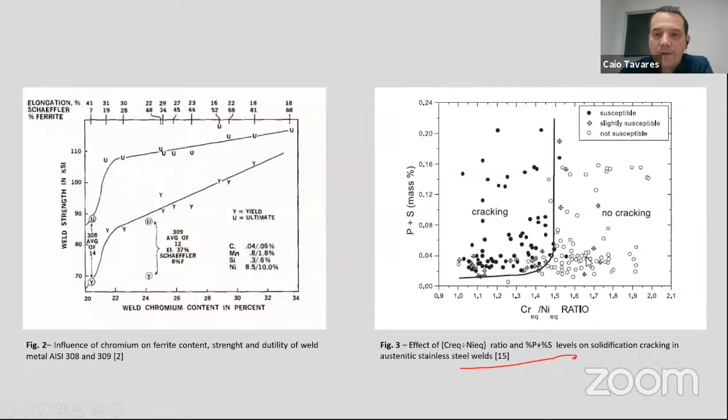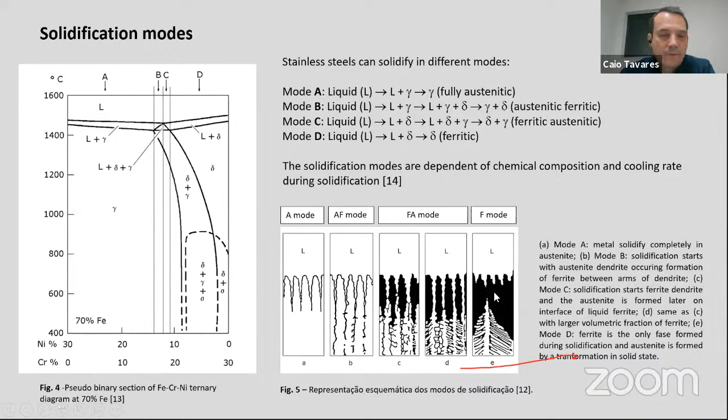So the phase diagrams are very important for austenitic stainless steel, to predict the kind of microstructure that you have. But unfortunately, most of the compositions that we have in the market have more than 5 components, and it's very difficult to find phase diagrams for stainless steel. Basically, what we find in the market are empirical methods, maps that indicate the amounts of the microstructure.

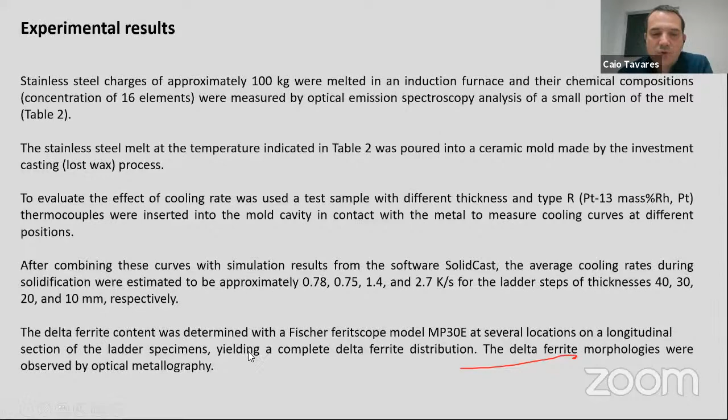To evaluate the effect of the cooling rate, we used a test sample with different thicknesses, and we placed a thermocouple inside to check the cooling rate. After casting, we combined the results from the casting simulation with SolidCast and the results from those samples, and we got cooling rates of 0.78, 0.75, 1.4, and 2.7 kelvins per second in different steps of the sample. The delta ferrite was determined using a Fischer ferritoscope in several locations of these specimens, and we also looked at the delta ferrite distribution in the microscope.

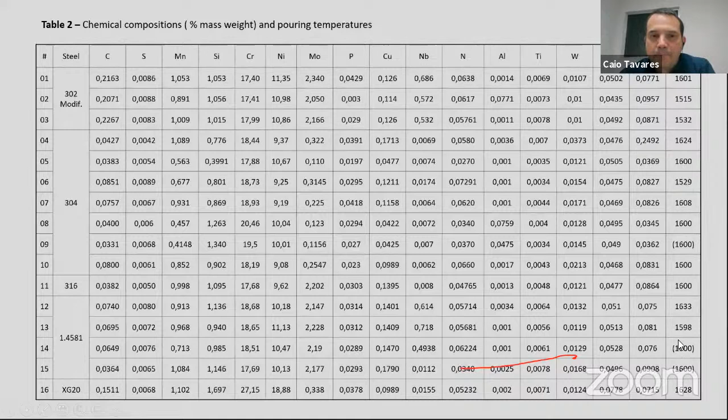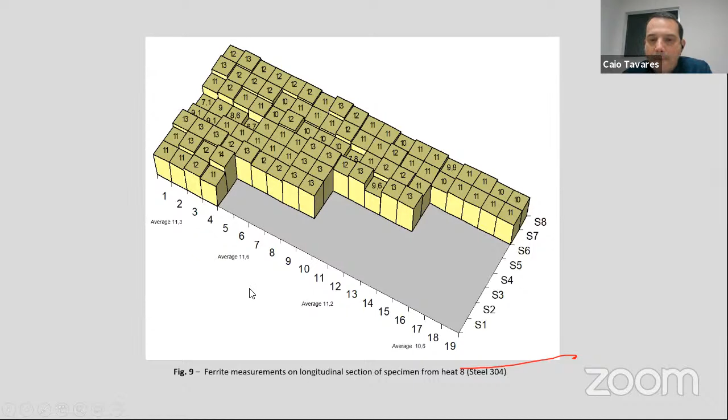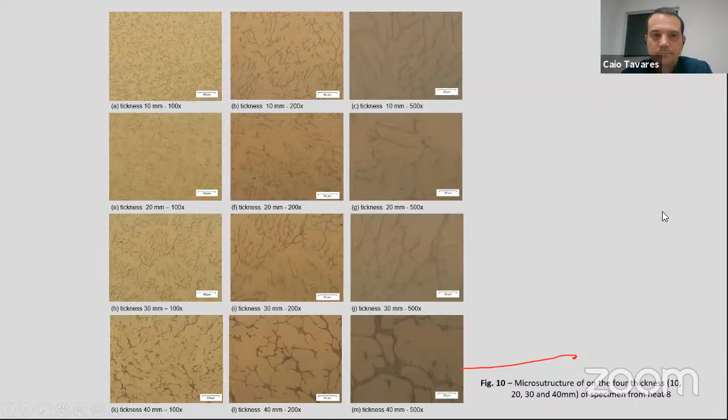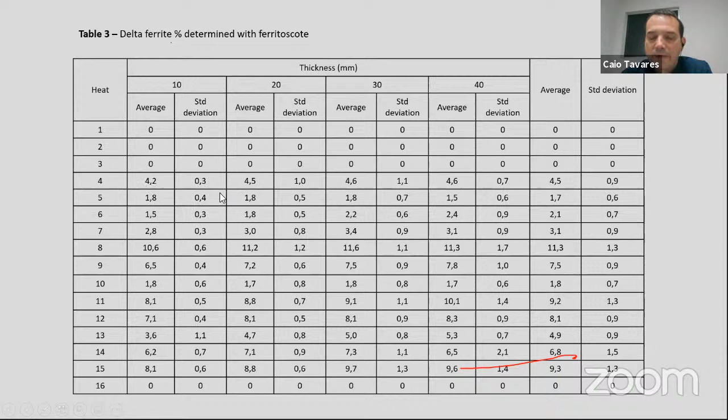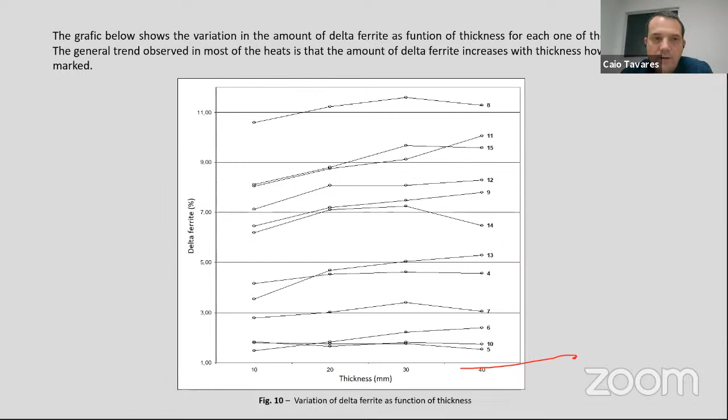In some samples we saw an increase of delta ferrite according to the thickness, but in some we didn't see too much variation. So the effect of thickness on delta ferrite is not very marked or pronounced.

So here's the analysis of the practical methods. After getting those results in these practical samples, those 16 samples, the intention is always to compare the results that we got on the far right with those formulas that I showed in the beginning, to compare the efficiency of each formula and see which one is closer to the results that we got.

So first of all, we need to calculate the chromium equivalent and nickel equivalent, using the proposed expressions, the ones I showed here in the beginning. Using those formulas, we tested all of them in this study against the results that we got in the samples.

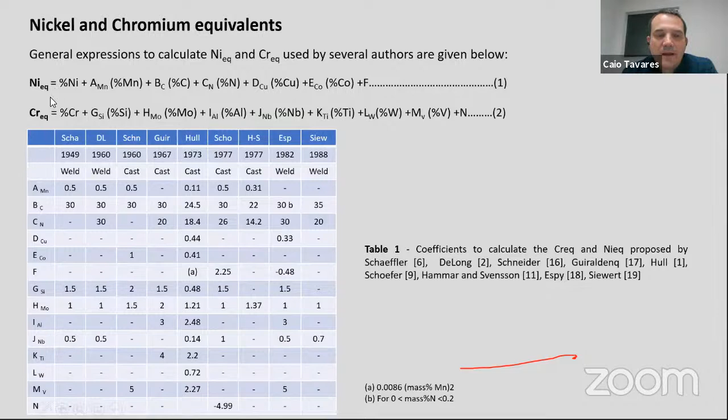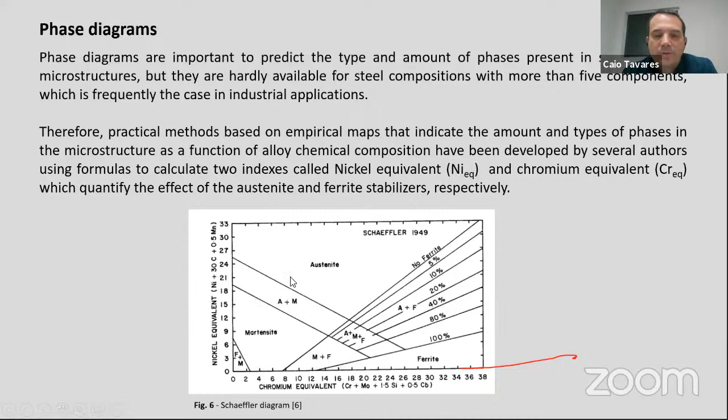When you get those values, we need to go to diagrams like that to evaluate the amount of ferrite in the microstructure. But unfortunately, some authors only propose formulas to calculate the chromium nickel equivalent, without giving us any isoferrite diagram. So when we use those formulas, we need to use the isoferrite diagram from another author.

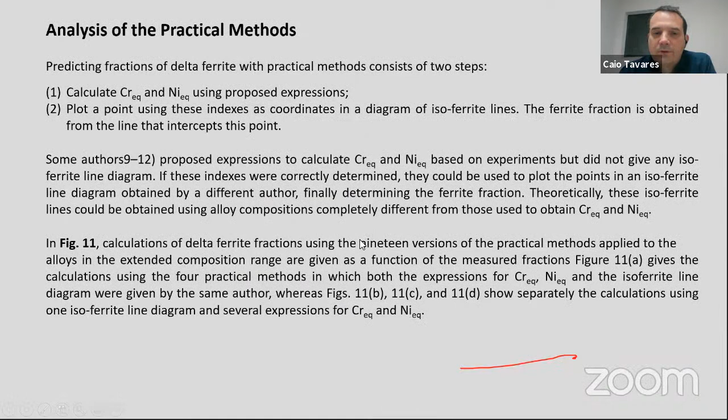Here on picture 11 we see the calculations of delta ferrite. Basically in this picture, we use the chromium nickel equivalent and isoferrite proposed by Schaeffler, one of these authors: DeLong, Siewert, and Schoefer.

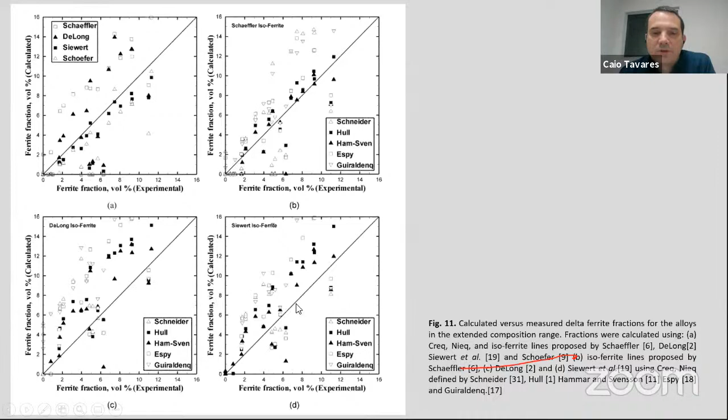In this one, we plot the results using the isoferrite line proposed by Schaeffler, DeLong, and Siewert, and using the chromium nickel equivalent proposed by Schneider, and Hammar and Svensson. So here in each map we use Schaeffler, DeLong, and Siewert, and we test those formulas to evaluate the one that is closer to what is predicted here.

So in order to interpret the results, we used some statistical parameters, calculating each group of alloy to better understand the difference between each formula. We calculate the relative error, the error, the standard deviation, and here the CI is the critical interval.

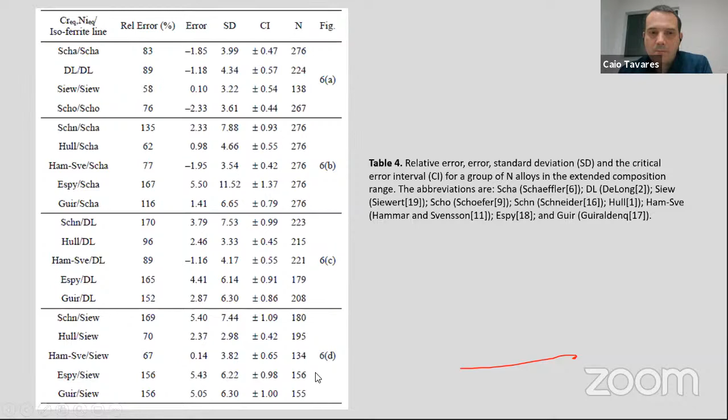And here were the errors that we got: the standard relative errors, error, standard deviation, critical interval of each of these studies that we did. And those are the graphics that we observed there.

So our conclusion here was, if we made different step thicknesses later in this work, to show the cooling rate and amount of ferrite on the microstructure. So we see that those samples have different cooling rates, but have a weak effect on the amount of ferrite.

And we see that in 50% of the specimens with ferrite in the microstructures, the hypothesis test indicates that increasing cooling rate decreases the amount of ferrite. It is in agreement with some results presented by Kim et al., and Pereira and Beech.

The calculation of ferrite fractions using the practical method proposed by Siewert gives us the lowest relative error among the 19 methods examined in this work. So this was the best formula that we got, that's closer to the results we got in ferrite content in our samples.

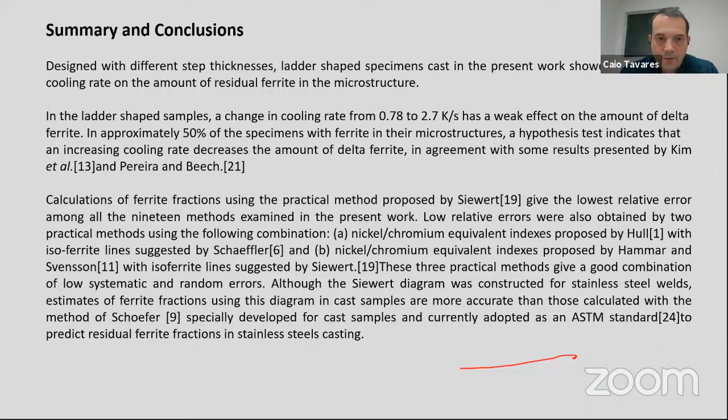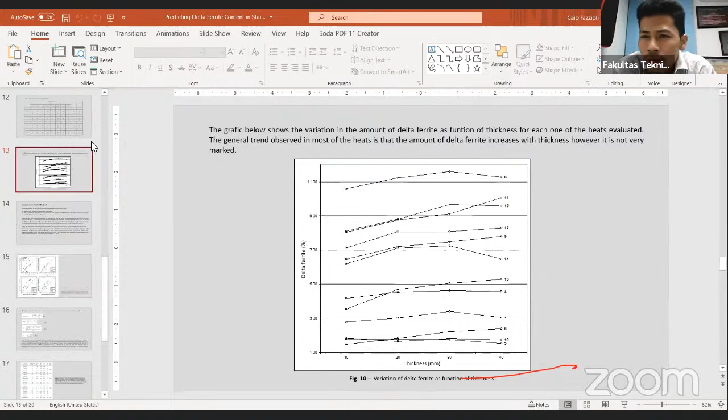Austenite is non-magnetic, as I remember. Yes, that's correct, and the delta ferrite is magnetic. So you use the eddy current method to distinguish the amount of the magnetic portion that you have inside the microstructure.

Okay, so we are still waiting for the next question. I will ask you again, Mr. Caio. Even though I don't teach the course in steel, I'm just curious about your slide.

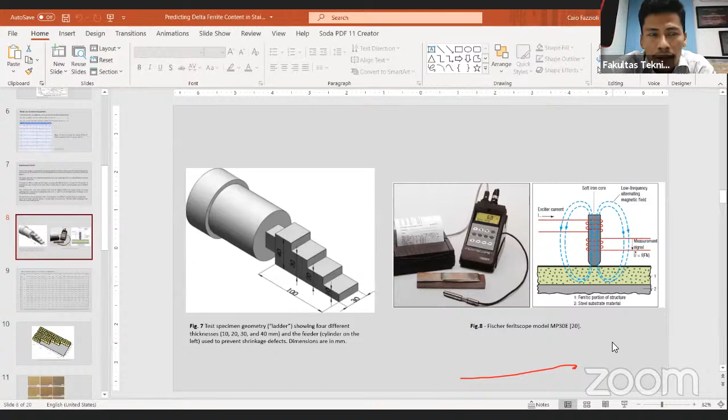It is written that delta ferrite can reduce the hot tear susceptibility. Can you explain to us how this delta ferrite reduces the hot tear susceptibility of stainless steel? What is the mechanism? Usually, the main issue is when we have a stainless steel that is 100% austenitic, meaning there is zero ferrite in the microstructure.

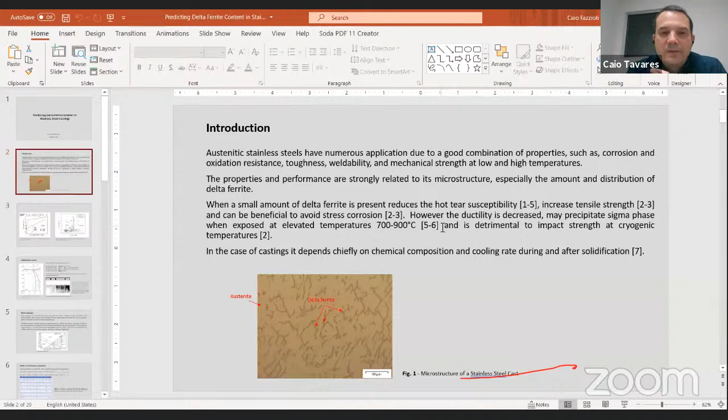The experience I have in casting is that when you have zero ferrite in the microstructure, usually during solidification it's very common to see hot tears. Also, when this kind of component requires welding, it's very common for this to happen.

Yes, but what I'm missing is from the physical metallurgy perspective. Can you explain why, if there is a significant amount of delta ferrite, the hot tear susceptibility of stainless steel lowers? What's happening mechanistically is we have trace elements in the chemical composition, phosphorus and sulfur, and during solidification they go to the grain boundaries.

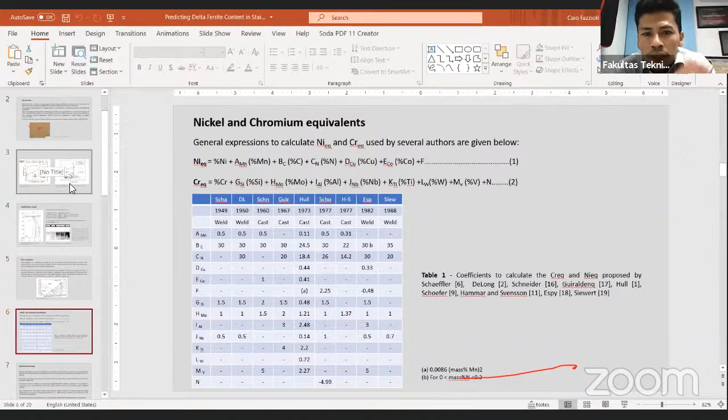Does the size of delta ferrite affect the corrosion resistance and mechanical properties of the stainless steel? Yes, the tendency is to increase the mechanical properties, but reduce a little bit the resistance to corrosion. So we need to be careful when we play with delta ferrite in stainless steel, to not compromise the corrosion resistance of the alloy.

And usually, what is the typical type of corrosion? Is it pitting corrosion? Usually it's pitting corrosion. I'm not a big expert in this subject, but I'd say that it's pitting corrosion. Okay.

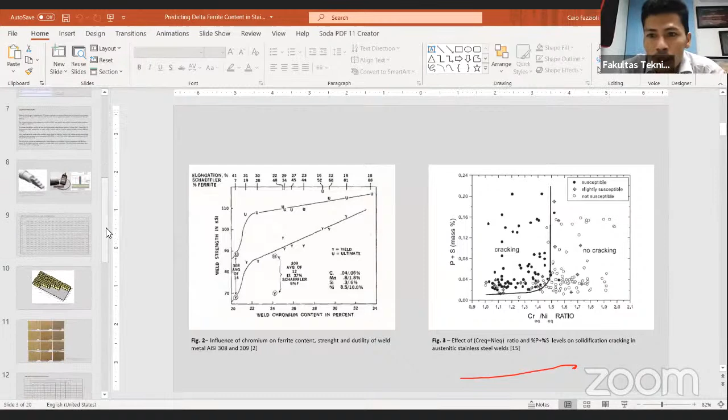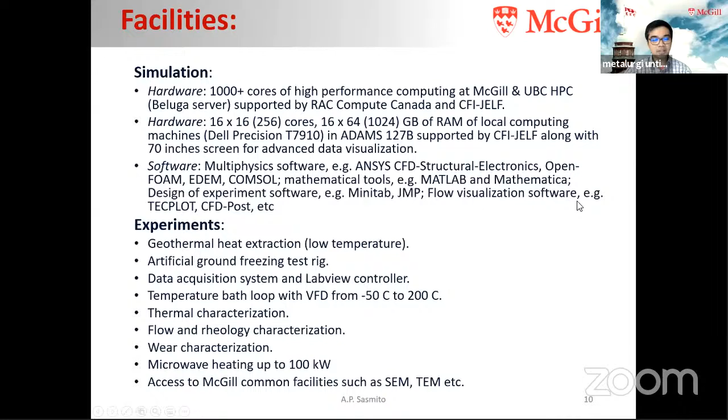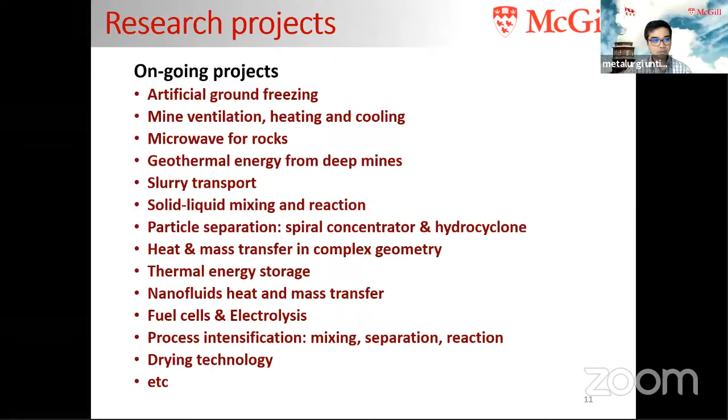Just to give you a little background story about the motivation for this project, the future of mining. To give you an overview of the mining industry in Canada, it's one of the biggest industries in the country, which basically contributes to about 20% of Canadian exports. The mining industry has been around for more than 100 years. And the advancement in the mining industry and research is very active here in the country.

So the government, industry, and academia have a vision of the mine of the future, in which mining will be all automated, continuous, and everything will be remote. We will have pre-concentration and more effective mineral processing, more sustainable, with a reduced carbon footprint, and environmentally more friendly.

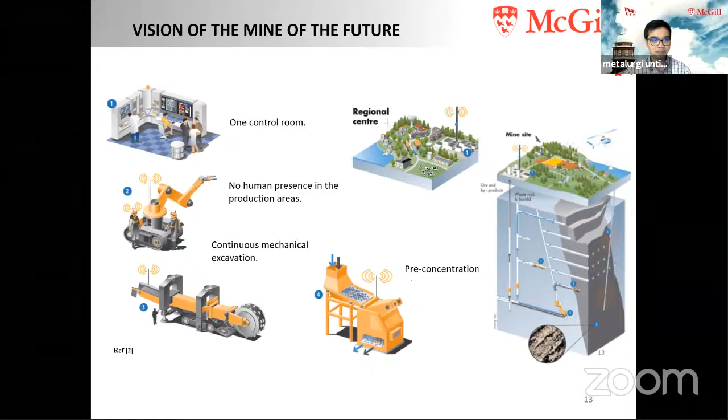So one of the challenges here in the mining industry, for hard rock especially, is that the mining method is usually drill and blast. So when we know where the ore is, we drill the ore, we blast it, and then we muck, and then we transport it, send it to the crusher, from the crusher to the grinder, and the subsequent mineral processing. The challenge of hard rock is that the energy requirement for crushing and grinding is huge because of the strength of the rock.

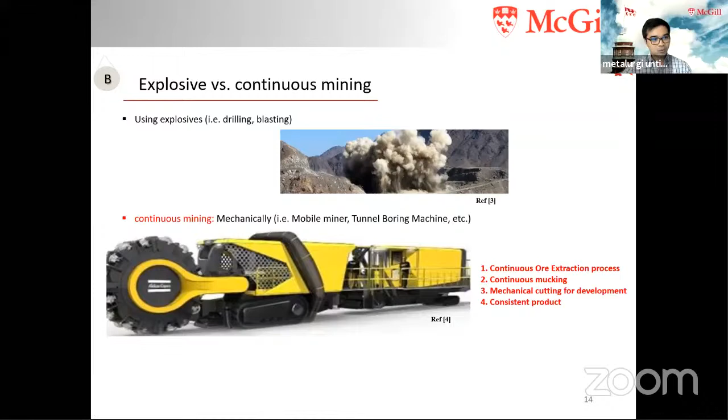And also it is impossible to mine hard rock with a continuous mining machine. When we do drill and blast, basically, it is a batch system. We need to drill, to blast, to muck, and the productivity of such techniques is pretty low. The future of the mine, on the other hand, is to create a continuous mining system. So we are working with some manufacturing companies to develop technology to create a machine that is able to excavate hard rock continuously.

So we evaluated several technologies to fragment the rock: mechanical, thermal, fluid, sonic wave, chemical, electrical, and light, like laser. The study was done in 2008, and the conclusion of the study is that a combination of electromagnetic induction, which is microwave, with mechanical force, like mechanical tools, is among the best in order to develop the continuous mining machine.

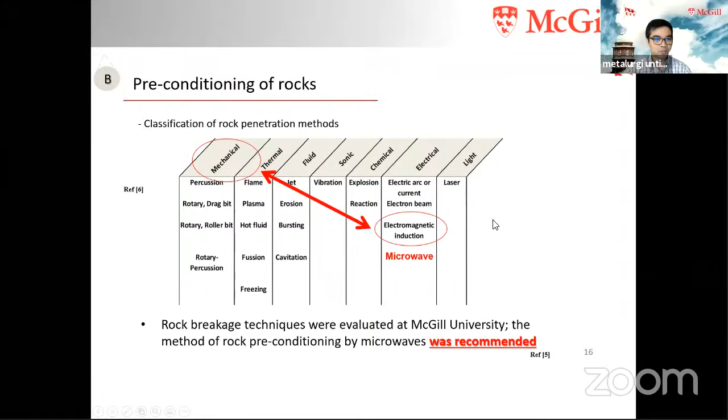So microwave has been selected, and we have been working on microwave since then. We evaluate how the microwave affects the rocks, how the microwave will create cracks in the grain boundaries, and then how we use microwave to precondition the rock before it is excavated using a continuous machine such as a tunnel boring machine or a mechanical cutter.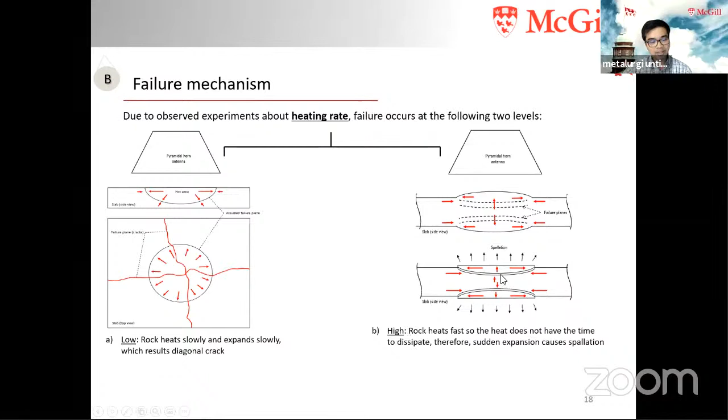So we evaluate different failure mechanisms when we microwave the rocks in the lab. There are basically two different modes of failure at different heating rates. When we irradiate the rocks with low microwave irradiation, the rock heats slowly and expands slowly, which will typically result in diagonal cracks. While if we use high energy intensity of microwave, the cracks are usually based on tensile and sudden expansion, and it often causes spallation of the rocks.

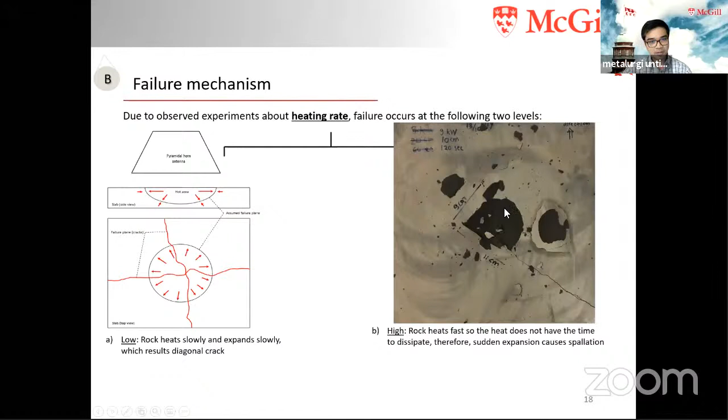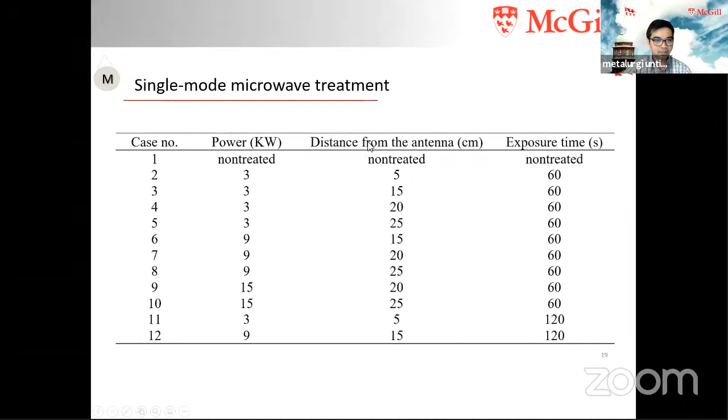So this is an example of the photograph when we microwave the rocks. Some of the rock surface becomes softened and sometimes it spalls. In our lab, we have different microwave facilities from 3 kilowatt, 15 kilowatt, and at the moment we are building a 100 kilowatt microwave for pilot demonstration in the field. So we did some tests to microwave the rocks with different intensity, different distance from the antenna, and different exposure time.

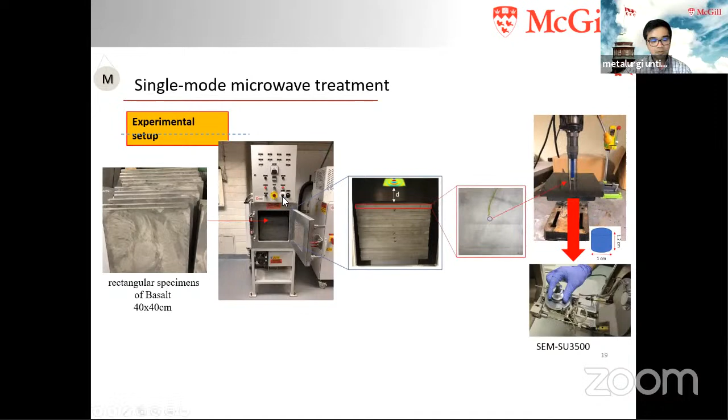We use different types of rocks like basalt. We have some samples of kimberlite from our industry partner, and iron ore from our industry partner as well. And then we irradiate the rocks. We characterize the cracks using SEM. We measure the crack density, the length, the size. And we can see here after the rock is microwaved, it creates micro cracks. We also quantified it; you see here the non-treated sample.

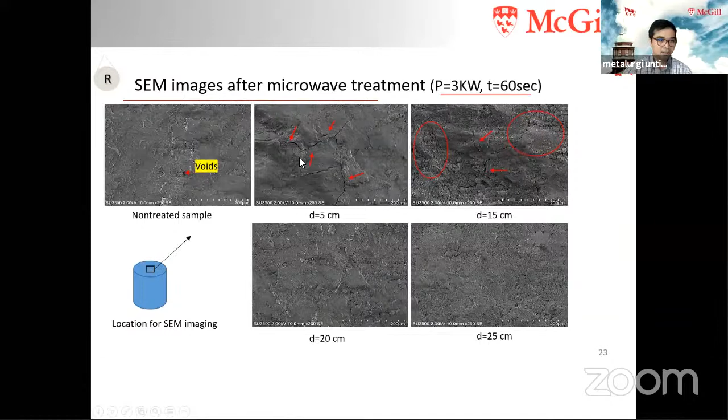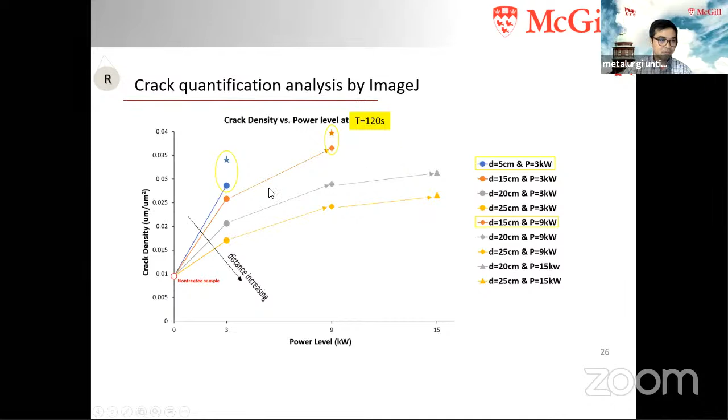Basically, there are almost no micro cracks. When we microwave the sample at 3 kilowatt and 60 seconds with different distances from the microwave antenna, we get different crack patterns. This is another example of the result. The result is summarized here: basically when we increase the power level of microwave, the crack density increases. And also when we increase the microwave duration, it affects the crack development.

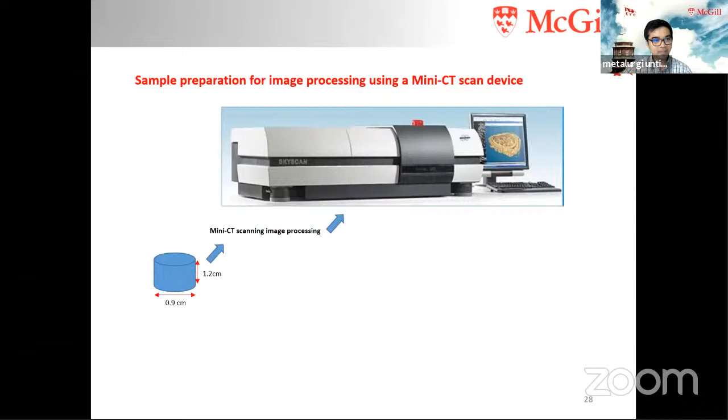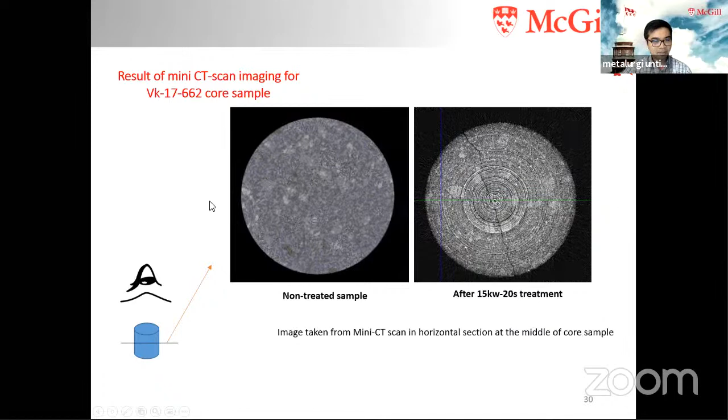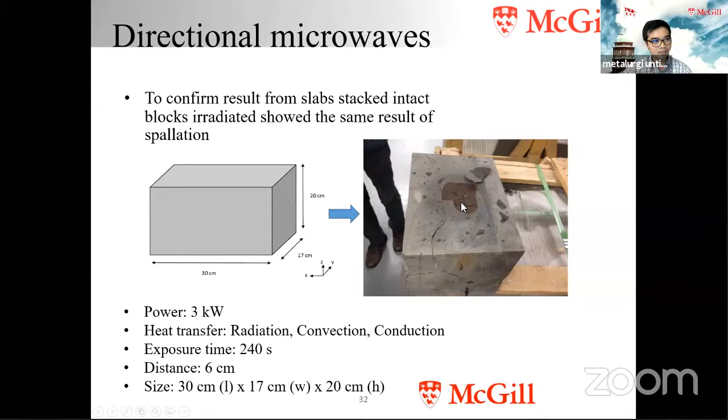After microwaving, we measure the tensile strength of the rock. It is evident here that after microwaving the rock, the strength of the rock decreases. And when this is 0, it means that the sample is completely broken. And in some cases, the rock melts because it heats too much. This is actually what we don't want to do, to heat up the rocks and melt the rocks.

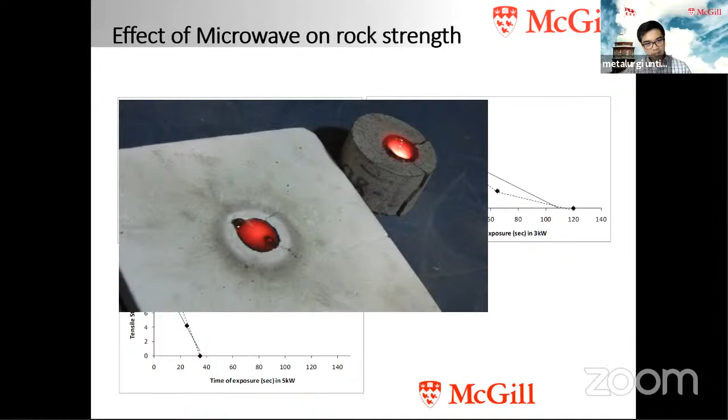Because in some of our samples, we got kimberlite from diamond mines, and the company basically doesn't want to burn the diamond. So what we want to do is really to reduce the strength of the rock and then attack it with the mechanical cutter, and some of the micro cracks are still there in the rocks, which will further help the crushing and grinding of the rock, so that the energy from mine to mill can be reduced significantly.

Not only experiments, we also model this. This microwave rock system is quite challenging to model because it involves several physics, like the electromagnetic, which is based on Maxwell theory. If we look into the mathematics of it, it is basically a hyperbolic partial differential equation coupled with heat transfer theory, which is basically a parabolic equation, and then the solid mechanics theory. And it has to be three-way coupling, because when you microwave the rock it heats up, and the thermophysical and dielectric properties of the rock are temperature dependent.

For example, the permittivity of the rock at 25 degrees Celsius will be different than the permittivity of rock at 200 degrees Celsius. So that's why it has to be fully coupled between electromagnetic and thermal, and then the thermal expansion will create expansion of the grain boundaries, and it creates cracks. Those cracks will also affect the heat transfer because of the release of the energy. So we model the three-way coupling of wave, thermal, and mechanical system of our rock microwave.

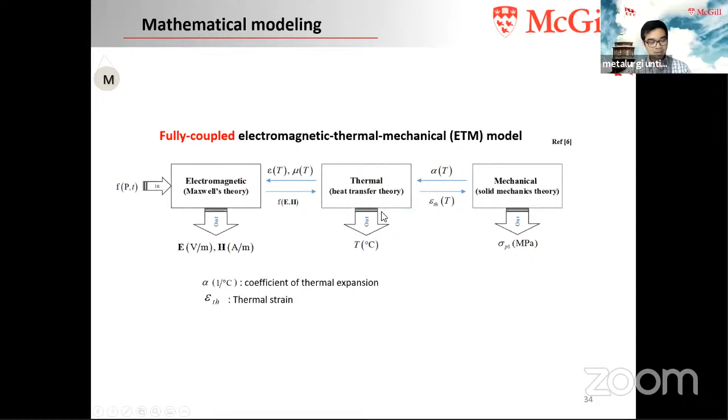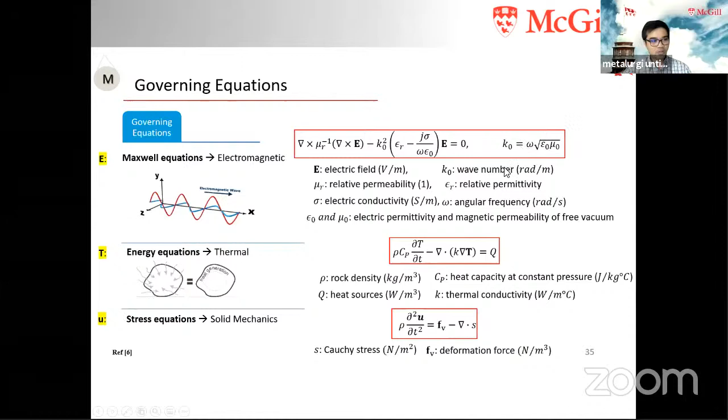This is a little bit of the theory of the governing equations, like the Maxwell equation, the heat transfer equation, and the solid mechanics equation. We measure the thermophysical and dielectric properties of the rocks. One of the challenges here is that some rocks are homogeneous, but most of the ores are heterogeneous, meaning that there is a lot of variability in the grain of the rocks, which makes it very challenging.

So we have two approaches here. The first one is a pore scale model. The second one is a volume average model. The pore scale model basically is more accurate, but computationally it is much more expensive. So we try to bridge the gap by correlating the pore scale behavior with the volume average behavior in order to optimize the computational cost.

This is an example of the result of our simulation, how we can predict the electric and magnetic field within the rock, how different rock characteristics and different microwave designs affect the distribution of the electric and magnetic wave, and it results in different heating rates and heating patterns, and it is validated with our experimental measurement from the thermal camera.

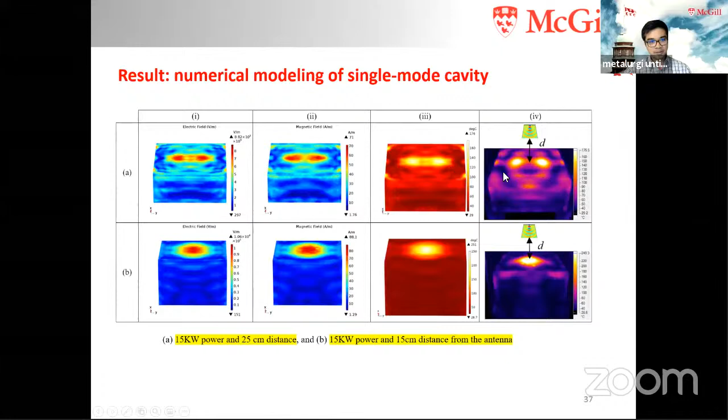So we extensively validate our model, not only at one or two conditions, but at various different conditions, and we have been able to validate the model with very good accuracy, with error within less than 5%.

At the moment we are already able to model and map the wave, thermal and mechanical behavior, and now we are working on coupling the model with the mechanical tool so that we can use the model to assist in the design of the mechanical cutter.

I also have two students that are now working on the effect of microwave on grinding and crushing of the ore. And we are looking into the possibility of using microwave to reduce the energy in grinding and also to improve the particle size distribution and recovery rate. And we also use microwave for drying and dry processing of the minerals.

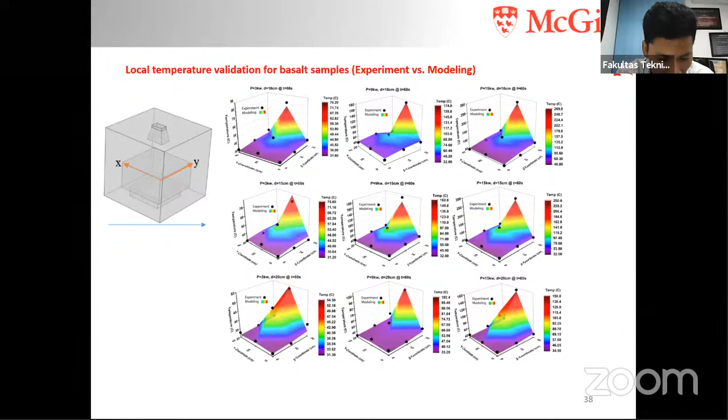Maybe most of the participants don't understand how this microwave can heat the rocks and then cracks are present inside the rocks. So maybe can you explain more how this microwave can convert

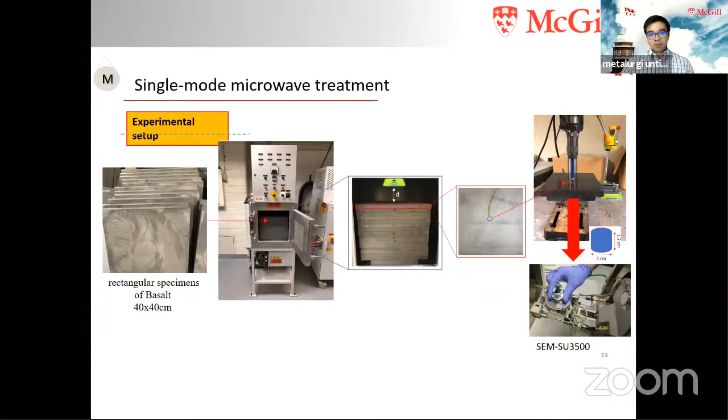Yeah, it is basically very similar to the microwave oven in your kitchen. When you supply an electric and magnetic field, I don't have that slide. Anyway, in your microwave oven, when you supply an electric and magnetic field, from the molecular point of view, those high intensity electric and magnetic waves disturb the molecular bonds of your materials.

And because of the wave, it oscillates, and from the molecular point of view, it creates chaos, and that chaos absorbs the energy that heats up the materials. And why does it create cracks in rocks? Because rocks usually consist of different grain materials with different thermal expansion. Say, in this case, iron ore. There is a gangue material and the ore, right?

It expands because these two materials have different thermophysical and dielectric properties. One grain will expand more than the other. And when the grain expands, it creates micro cracks. It cracks the bond between these materials. That's why we see a lot of micro cracks inside the rocks and the ores, because of this difference in thermal expansion and heating rate.

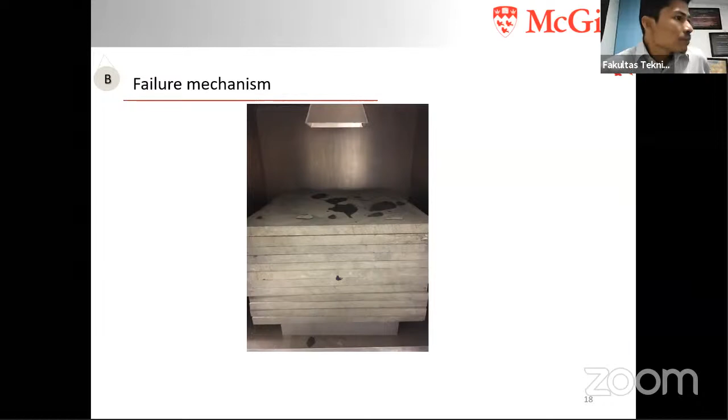Okay. So, I think it's a very good and interesting presentation, Prof. Agus.

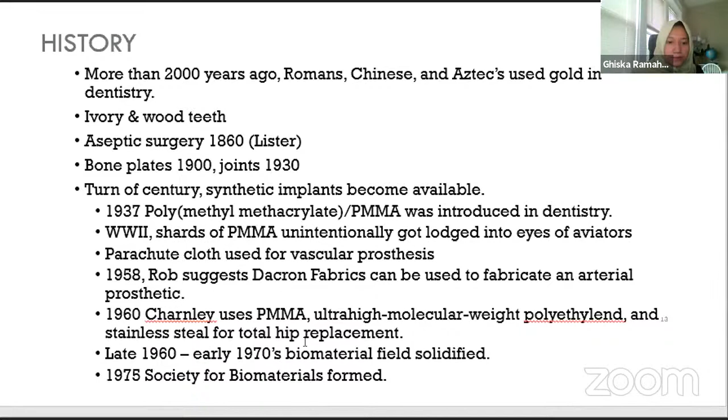Started in early 1900s, bone plates were successfully implanted to stabilize bone fractures and accelerate healing. By the 1950s or 60s, blood vessel replacements were in clinical trials, and we also got artificial heart valves and hip joints.

As you know, biomaterials have to do with metallurgy or materials engineering, which is my background. I'm pretty sure all the students here know about the 4 groups of materials: polymers, ceramics, metals, and composites.

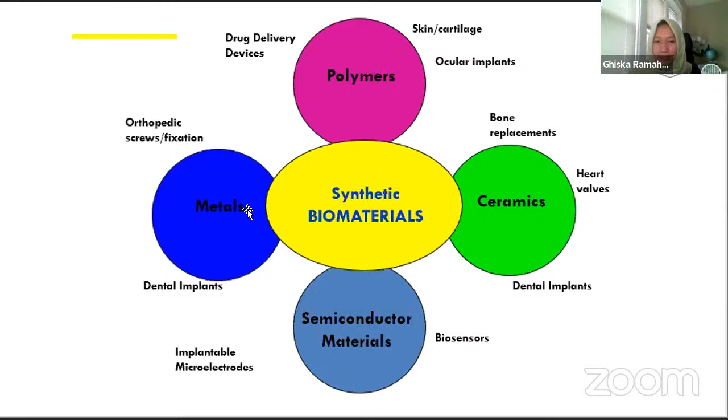Polymers can be used for drug delivery devices, skin cartilage, or ocular implants. Ceramics can be used for hard tissue support or scaffolds for bone replacement and dental implants. Metals can also be used for hard tissue scaffolds. There are a lot of opportunities to develop biomaterials throughout our body, from the head and eyes to the toes.

I'd like to present the evolution of biomaterials. There are 3 generations of biomaterials. The first generation largely depended on being inert, meaning we don't want any interactions between cells and the materials implanted in our body. It was mostly used for teeth or dental functions, while metals were the king of this first generation.

We can see in the ancient period, gold and silver implanted into teeth to support the function and structure.

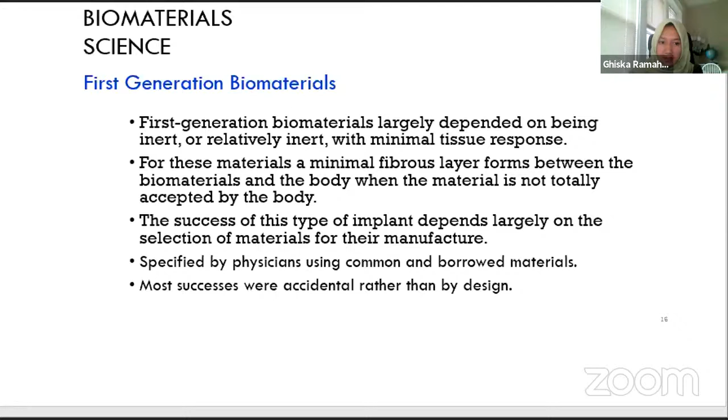The second generation of biomaterials concerns more about the interaction between cells and materials. We don't want it to be toxic, but we need some adjustment between cells and materials, like some interactions.

Here, people already started to collaborate between physicians and engineers, because physicians know what living systems look like and their mechanisms, while engineers know about materials and their mechanisms in different pH, temperature, fluids, and so on. So they collaborate and use advances in materials science.

In the third generation of biomaterials, development has focused on bioactive materials. So if you have damage in your tissue, the cells will be interacting with the materials, and we also get degradation of the materials, which induces the cells to do self-healing, like they regenerate themselves. In the end, we get our native tissue, naturally from our body.

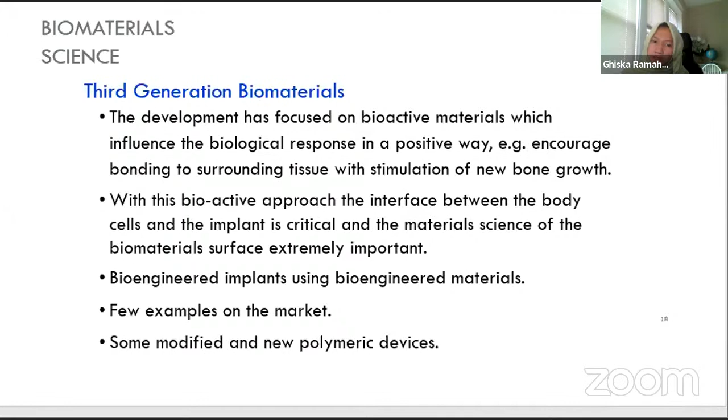Most of these are polymeric devices. These are examples of biomaterials in tissue engineering. As a soft tissue example, I can show you skin tissue engineering, where we can use dermagraft.

This is basically PLGA, polyglycolic acid and polylactic acid. We can see in 2 months we get total reparation of skin tissue. This final tissue is not the one that we synthesize, but it is our own cells that are generated, induced by the incorporation of the biomaterials.

We also get hard tissue replacement, like bone scaffolds. If we look at the bone, we got about 67% apatite, which is calcium phosphate, and 30% organic phases, which can be collagen and other extracellular matrix. So we need to make bone scaffolds which mimic the structure of bones.

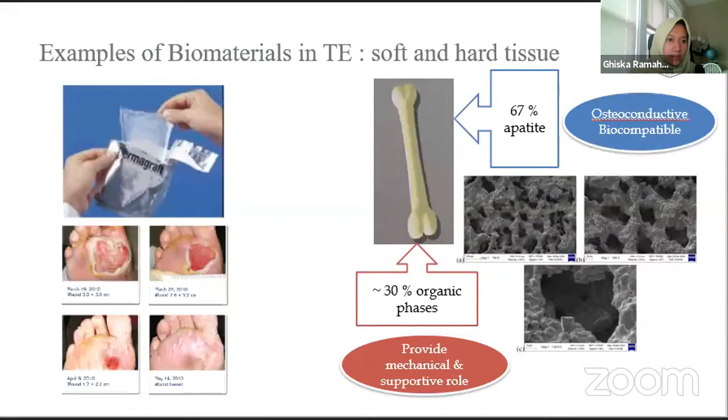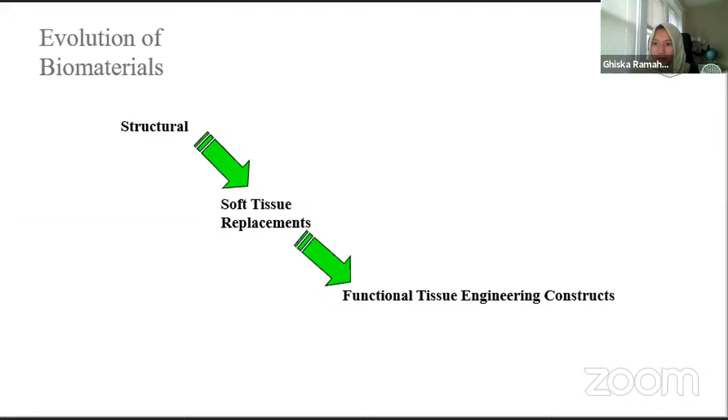I've already talked about the evolution of biomaterials from first, second, and third generation. In this era, people are focusing more on functional tissue engineering constructs. This is what we are doing in our lab in Washington University in St. Louis, especially in the Huebsch lab, the place where I'm working.

We work on how to mimic the key aspects of tissue microenvironments for in vitro modeling, like outside the body, to support tissue engineering or regenerative medicine. Regenerative medicine is part of tissue engineering, which induces self-healing of cells, or solves the whole problem by inducing the functionality of the cells.

I'm working on two projects. The first is genetically defined engineered tissue for pharmacogenomics biological testing, and also new materials for local presentation of biologics from cell polymers. But today I'm going to focus on the genetically defined human iPSC project.

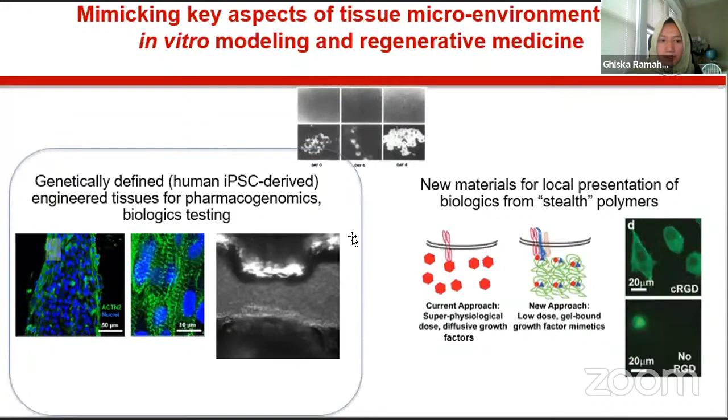This study is basically motivated by a high number of cardiovascular disease worldwide. It's still the first killer, especially sudden death.

One of the cardiovascular diseases is hypertrophic cardiomyopathy, where you have a thickened wall of your heart, thickened septum, and thickened left ventricular wall. As a consequence of this thickened heart wall, the heart is not really able to pump your blood throughout the body.

Many animal studies have been conducted to study this mechanism, including mouse studies. But these are human action potentials, the mechanism of your heart beating in every single beat. We have different mechanisms between human and mice, at least.

So instead of only relying on animal studies, we need in vitro studies, testing outside our body, a development outside of our body with human genetics. We need to know how the physiology of the heart needs to be translated into this in vitro system, with human genetics incorporated.

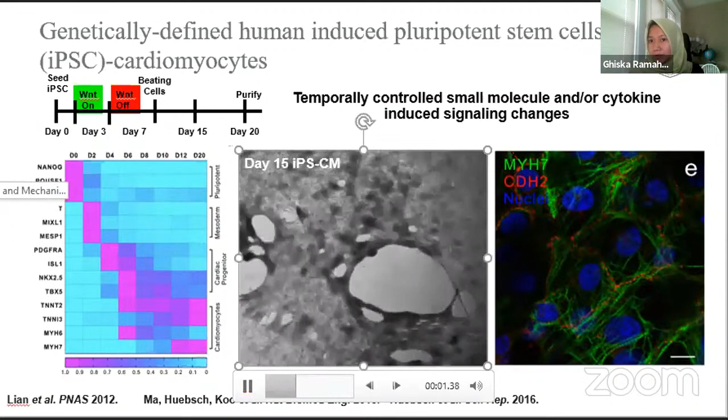We incorporate these in vitro human-induced pluripotent stem cells to study cardiovascular disease. But the second aspect here is we need to know how the physiology of the heart needs to be translated into the in vitro system.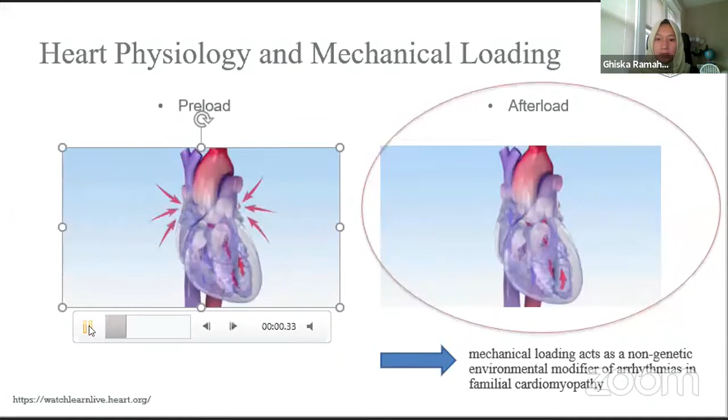If we look at how our heart beats, it's basically related to preload, when the heart stretches at maximum to be filled with blood, and the afterload mechanism. The heart contracts, and the tension that the heart muscle has to overcome is afterload, in order to eject the blood throughout the body.

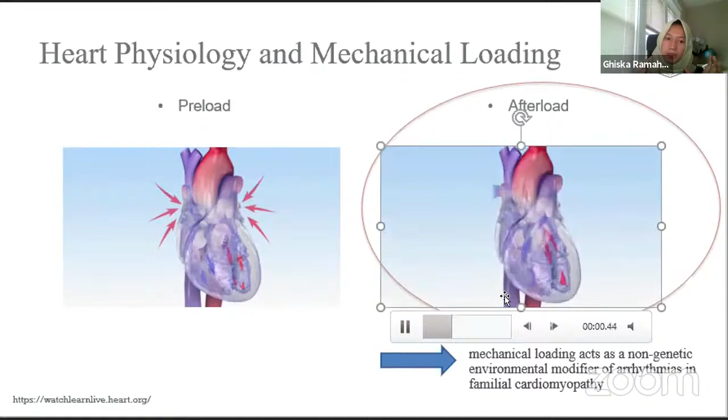We know that mechanical cues, mechanical aspects, can affect heart muscle contraction.

So other researchers tried to incorporate human pluripotent stem cell cardiomyocytes with type 1 collagen as the extracellular matrix, also incorporating fibroblasts. They made this shape and then stretched it to see how the preload, the stretch of the heart, can affect the biological function.

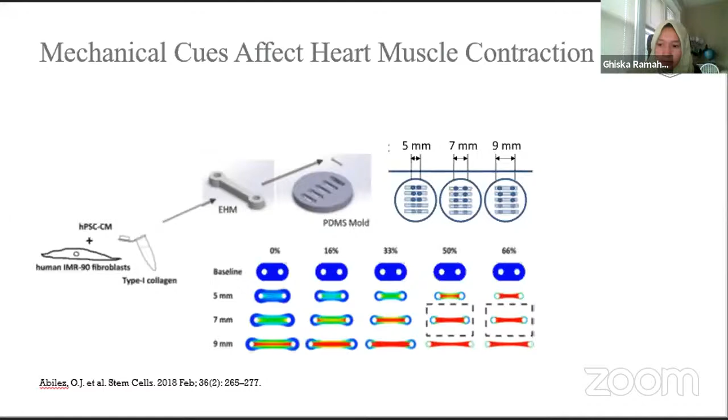And related to the afterload—when the heart contracts—other people also did studies on stiffness. These are the cells, and these are the PDMS substrate with a beam cantilever facing upward. If you have cells between these pillars, they will contract and the cantilever will be bent.

Here we can see that if we make the substrate stiffer, we see higher contraction expressed by the cells, by the cardiac cells.

But the issue here is that it's hard to do this experiment at large scale due to complexity issues. If you incorporate collagen, you have other factors that might play a role, so you don't know which one to focus on.

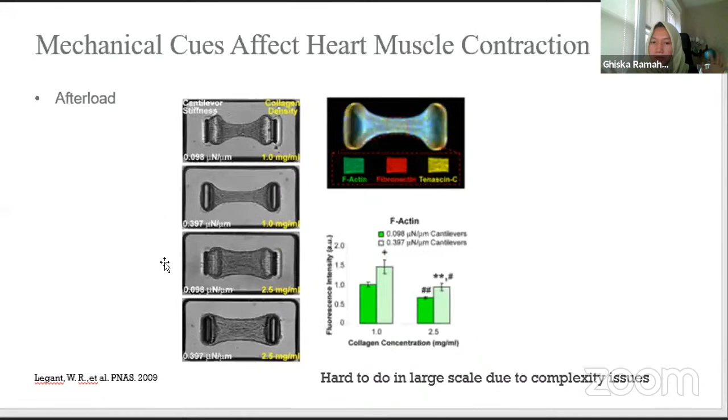So here in the HIPS lab at WashU, we derived, we made, iPSC engineered heart muscle. It's basically using these stencils, like a mold. I know that in metallurgy you have worked with molds and other stuff to cast your melted iron or melted metals, and here it's basically similar.

And it's specialized in myocytes. And it's also important for us to see this structure because it can be related to the heart function or electrophysiology. So it's amazing to see how these cells are beating. And this is what we study further in this paper.

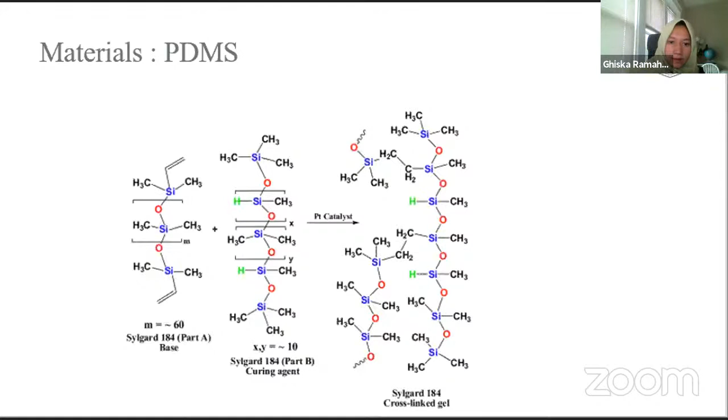And why we make PDMS? Because like with polymers, you can do some surface modification. It's pretty easy to make any modification in the atomic or molecular aspects. So here what we did is we have the PDMS, and by doing some plasma oxidation, we have this OH group on the surface of the PDMS, and this hydroxyl group would enable us to do some chemical treatment. Here we have silane treatment. So basically, we have this silicon oxide and a long branch of polymers, which ends with the NH2, or the amine group.

And then by doing some other cross-linkage by glutaraldehyde, this PDMS with NH2 group can be covalently bonded with fibronectin. So what is fibronectin? Fibronectin is basically a protein that can bind to your cells. So once we get the fibronectin onto the PDMS, the cells can attach to our PDMS. So then we can mechanically couple the cells with our PDMS substrate. Okay, and then we have our stem cells on top of the substrate as well.

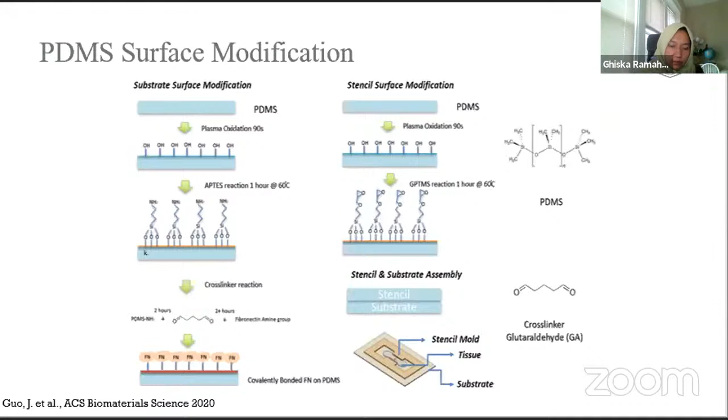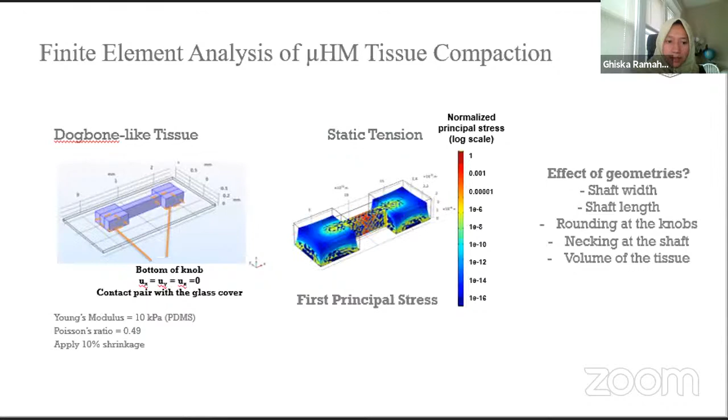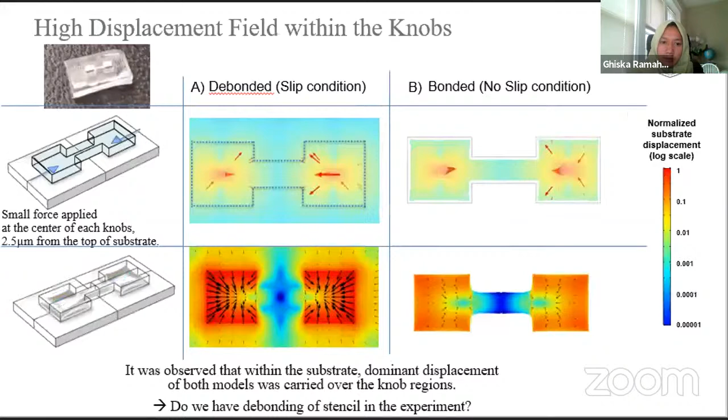And I also did some finite element analysis to see how the traction force can be expressed in this tissue. Maybe I would not go so into details, but basically we got our tissue inside this mold, and we were interested to see this sarcomere formation, or this tissue formation here. And then by observing this beating contraction, we convert it to the fluorescence signal. So we know that the high traction is observed within this knob area. I wouldn't go further with this FEA analysis, but basically we have the high stress observed within the knob area of the PDMS substrate.

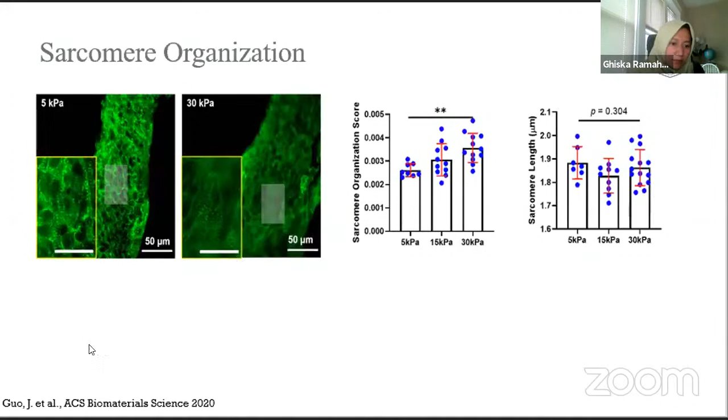And then the conclusion from this study is we developed a new in vitro platform to study how the mechanical aspects affect micro heart muscle physiology. By using several levels of rigidity, we investigate the micro heart muscle behavior, and these iPSC cardiomyocytes have better cell alignment and sarcomere organization, and it opens some other opportunities to study cardiovascular disease.

Okay, and I need maybe 3 to 5 minutes to show the scholarship opportunity, because I know that it might be helpful for the students or the alumni of Metallurgy Untirta.

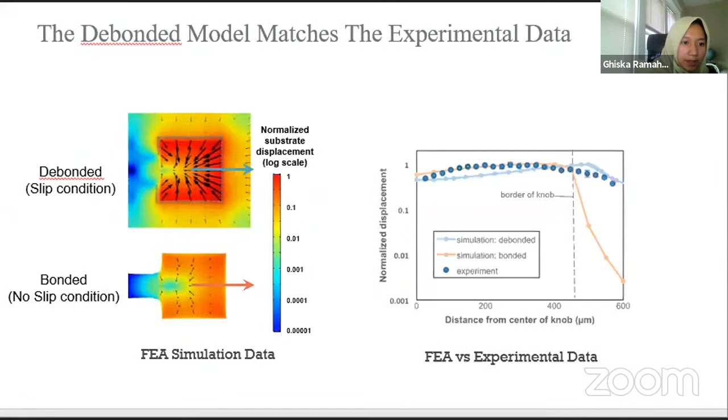Yeah, this is a good question, because biomaterials cannot stand by themselves. We also need to study the biomechanical and mechanical characteristics. So the test that we applied in this study is basically testing the materials' mechanical properties by doing a compression test. So we know that our substrate is 5 kPa, 15 kPa or 30 kPa. But for the cells, what we did here is traction force microscopy.

Okay. Mhm. Do we have any questions from the participants?